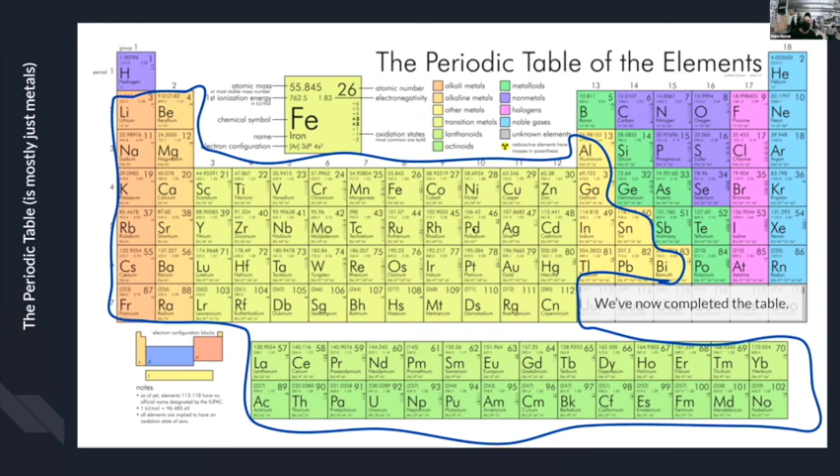Which is fascinating—most of our planet by mass is metal. There's tons of metal all over the place, and it gets used for all sorts of things. Iron is definitely going to be the biggest player in that game, but there's lots of other really fun metals to play around with. But just in general, if you're trying to understand metals, it's a huge category for what's going on there. I want to also say that it is a deep, deep well—you can get a degree in metallurgy.

You can absolutely go very deep in just this stuff. This is just the blend of carbon to iron and its temperatures and different things that happen so that you can get different versions of steel. And please don't try to understand that right now—if you already do, awesome.

But what is really neat is that metals, like water and ice, will melt at a certain temperature. And so you can get molten metal—you'll get this glowing effect down here. This is an effect called black body radiation, where things that get hot enough start to emit light just based on their heat. That's a really interesting effect that we'll look at and think about as we're working with metals over the next couple of weeks.

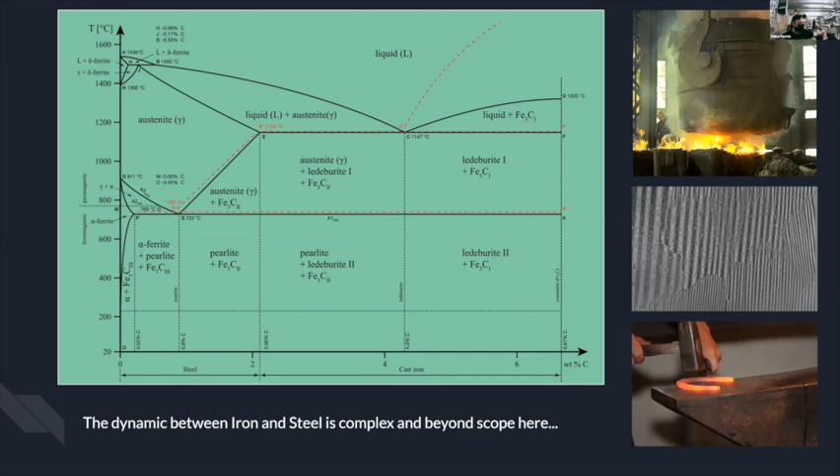And then another thing to think about with metals is that they have this sort of almost crystalline structure. This image here on the right is really a neat way to look at boundaries inside of a metal. It's different than wood—wood had those fibers, we talked a lot about grain over the past 2 weeks. In metals it's different—it's sort of one solid mass without any fibers. There are grains, but really it's sort of a solid thing without any pieces or internal structure very much, that's easy for us to get a hold of.

One of the things that's really worth thinking about with metals is that they are very hard. And maybe that sounds obvious, but toughness and some of those properties can really be quantified with things like metals. When you're talking to metal fabricators, they'll probably reference things like hardened steel versus cold rolled steel, and those different metals have very different workabilities. Then you've got something like aluminum, which is a much softer metal. So there's all sorts of range that goes along with that.

If you want to actually gauge hardness, there's multiple different scales for measuring it. It's essentially how well something can scratch something else. Not all metals, not all materials are the same hardness. In the wood shop, that doesn't usually come too much into view, like we think about softwoods and hardwoods. But in the metal world, it often is something that can be more easily quantified. The metals are usually more uniform, and it can be more important. If you're trying to make a tool versus a table leg or a support, you might have different hardness needs.

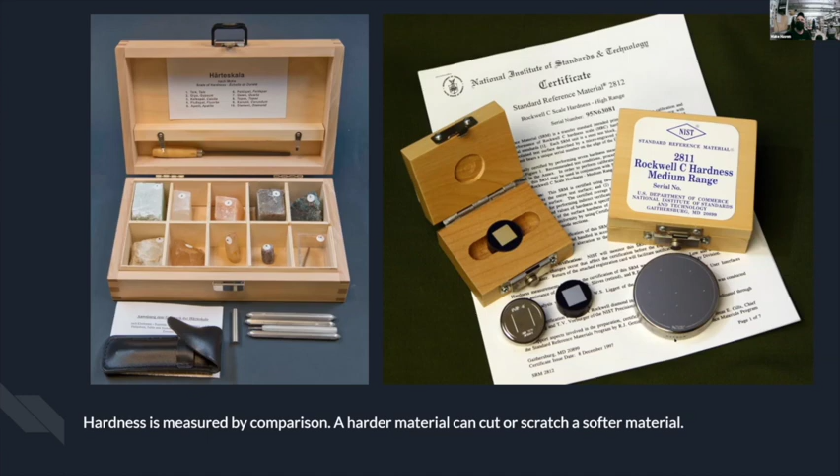It's not quite fair unless you're talking about similar materials, but this dynamic, even for steel, is something that for centuries sword makers have had to think about. The katana, the Japanese style sword, is fascinating—they're hardened on one side and softened on the other to make them springy, hard, and have a really sharp, maintained edge. That's true more broadly about most swords that were made: the sharp cutting edges were hardened one way or another, with a softer, pliable center so they could still flex and move a little.

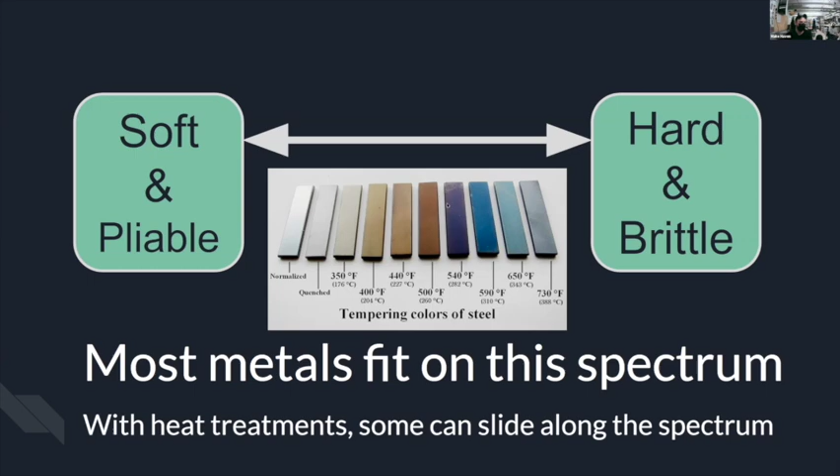Just categorizing metals, while we're trying to identify them, it's good to go through the names. We've got aluminum, which is a fan favorite. It used to be the most expensive metal you could get. The Washington Monument is capped with aluminum, in case you didn't know that, because at the time it was the most expensive metal. There's an electrical process that has to be used to get it out of rock, and that's what made it very expensive back in the day. Now it's super cheap all the time.

A machinist probably considers aluminum not even really a metal, because according to them it's too soft and gummy. I've definitely wrecked tools in aluminum. You can wreck an end mill by just having it scoop up too much aluminum, and it'll get gummed up in the tool, and then it's ruined, which is pretty frustrating.

Lead pipes, no one should be using anymore, but lead was originally used for plumbing. It's even gotten the Latin name on the periodic table, plumbum, for plumbing, although it's still not a good idea. We need to continue to not use that.

Pewter is a really interesting metal. There were lots of toys made with it because it melts at a really approachable temperature. It is fairly toxic while it's still molten, so kids' toys shouldn't be made out of it anymore, but if you want to make models, you're going to cover it up with paint anyway. It's actually a pretty fun metal to work with. You just need to keep that toxicity in mind while you're handling it. Wash your hands, do all the safety things, but it is a neat material.

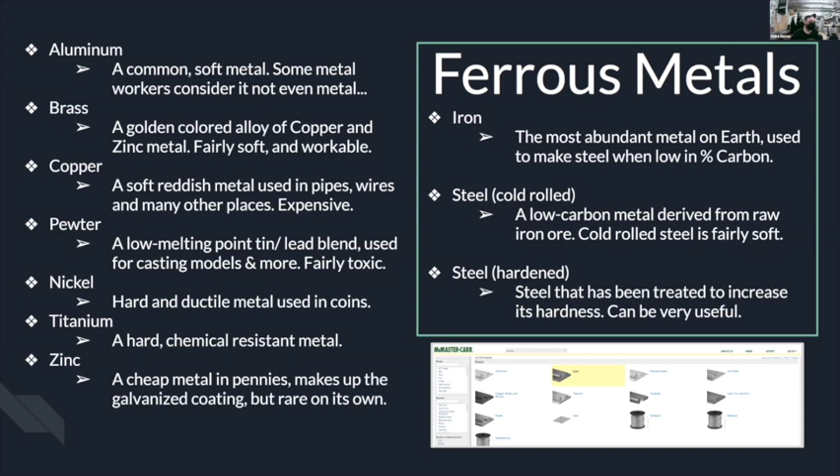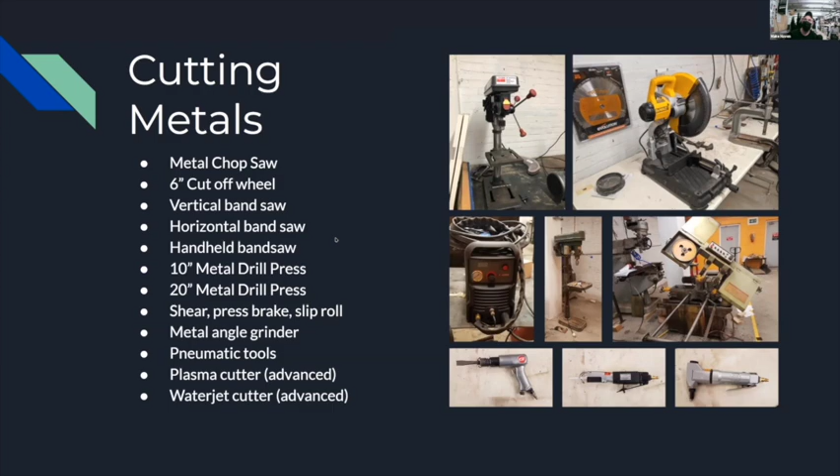Angle grinders are lots of fun. They're good for shaping things. They can be useful, but we have lots of other tools.

So if you want to grind or shape a metal, instead of just cutting it, you want to bend it, change its shape, deform it in some way. In wood, that's really hard to do. Wood doesn't like being bent, you have to steam it, heat it up, do other weird things to it. But metals do that fairly well. So it's a neat difference.

One of the people in last year's class was a metal jeweler, and she would make delicate, beautiful pieces of metal jewelry by bending and shaping. She made things that looked like flowers and all sorts of stuff out of sheets of metal. She could also do tempering to get colors and shapes out of the metals she was working.

In here you'll have there's sort of like a sander here, or these bench grinders. A bench grinder like this was always present in every garage I walked into in the Midwest, usually just for sharpening your lawnmower blades. That's what they were often there for.

But these sorts of things can be really helpful. They do come with grinding wheels. There's buffing wheels and wire wheels. Those can be swapped out, but they can give you different finishes on your metals. So if you want to try and get a shiny metal, you can head in that direction.

There's lots of these different sanding options. There's a large belt sander, there's a small belt sander. This is the brake and bender. There's also these little, this machine is a bit tricky, that's the shrinker stretcher.

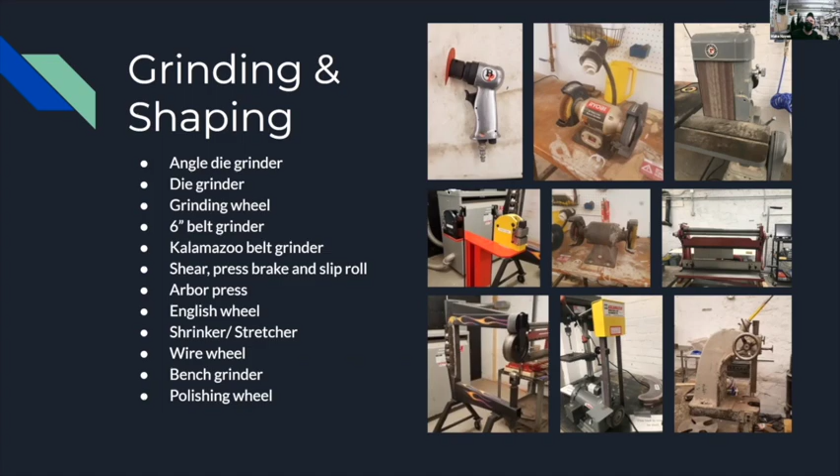If you have some metals that you'd like to bring together, there's lots of different ways you can do that. You can join metals with screws—screws are easily a great way to do that.

You may have used screws in your current or a previous woodworking project and noticed the threads for those are pretty big—you want space between them so the wood can be strong and held on. But machine screws have very tiny teeth; you can get a lot more hardness out of the metal, so the teeth, meaning the thread, can be much smaller. This thread has been specified for a very long time.

It's been a standard that somehow magically has spread globally. Very early on, since machine tools were first made in the 1700s, the thread standard became a standard very quickly. They're fascinating things—there's whole diagrams about them. But there's screws like this, there's machine screws, there's nuts and bolts—lots of interesting ways to distinguish that.

Other interesting ways to join metals are rivets. If you drill a hole, you can put a rivet through things, and they're a really interesting way to do it. These are rivets right here. You pass a rivet through two sheets, through a hole you've drilled in both, and then press it so it's up flush against this piece right here.

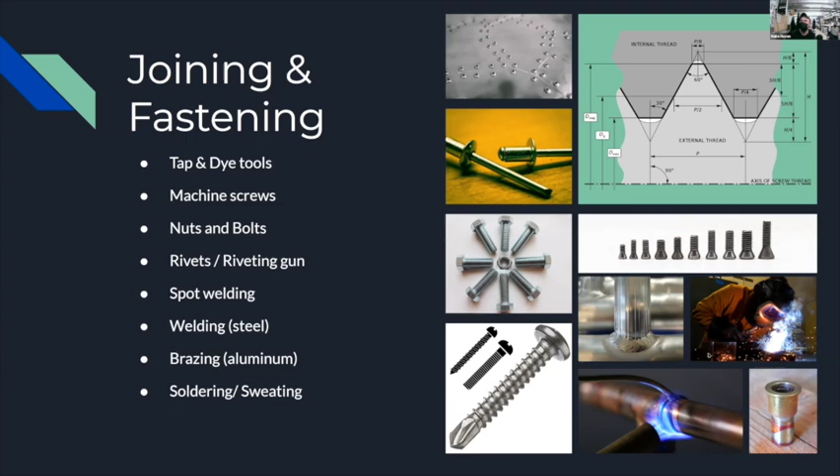Getting the MIG welding badge is probably the easiest of the welding badges, the most approachable type of welding to do. So that's a ton of fun.

A good question to ask is, what is a machinist? In the Midwest, everybody knows somebody who's a machinist, but around here I don't know if that's really true. A machinist is a special type of career, and just about every unit we cover here is a whole career.

A machinist is a person who can make things to specification. I have a buddy back in Cleveland who's a machinist that makes fighter jet parts, and he can produce things to within a certain specified tolerance. Machinists must be able to do that to a certain level of quality. Actually, a professional machinist making military grade parts, their pieces have to be to spec, otherwise it's a felony. It's fascinating how good machinists can be and how high that bar can be for a professional.

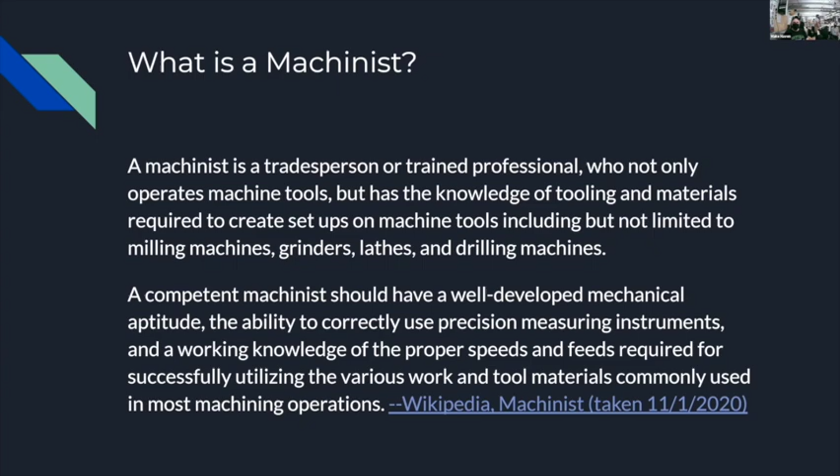Here, we're usually just sort of playing with things. We can get into that ballpark, but a machinist really has a deep well of skills at their disposal.

So if we try and think about the machinist tools beyond what we've described, we've got the metal lathe, the king of all tools. The first high precision tool ever made was a metal lathe, and from a metal lathe you can start to make all the other different tools. The metal lathe and the Bridgeport mill - a lathe is for spinning a piece of metal, and when you spin it you can cut away from it. So you make round things on a lathe usually, and square things on a mill.

They're similar in spirit - a lathe spins the piece of material you're cutting, whereas the mill spins a tool and then cuts through the material. So one has the spinning tool, one has the spinning material, but otherwise they're pretty similar. They're both very aggressive machines.

I really enjoy using the lathe. However, I want to say that those two tools in particular have day-long trainings with an additional cost with a certified instructor. It's a big deal because a metal lathe, as interesting as it is - and I want to use ours soon, I have a piece I need to really put into a true round - but like a metal lathe, if the wrong thing happens it can put a wrench through a brick wall, and it can put a wrench through you and not even slow the wrench down.

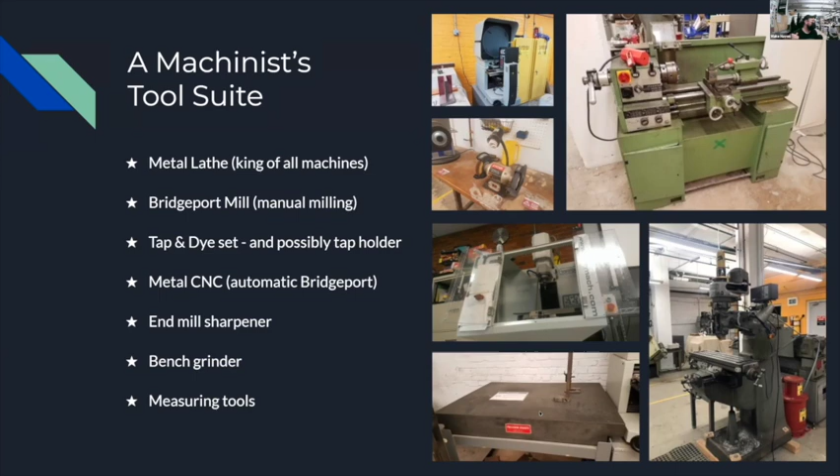Surface plates are really fascinating tools in and of themselves, but they're a high precision tool, which feels kind of weird for just a slab of granite. But it's a really cool one.

And then there's also other tools that are perhaps more approachable than the lathe and the mill: jeweler's tools, or hand working metal tools, where you might use an anvil with a hammer. You've got saws, like coping saws to cut through thin sheet metal. You can file things, hammer, saw through metals. A hacksaw can get you a long way in the metal shop. You can forge or melt metals with a blowtorch or an oxyacetylene torch.

The English wheel is fun. Files really work well. And if you wanted to get better at these things, there's lots of different ways you can do it.

If you wanted to work metal by melting something down and casting it, you can totally do that with just some sand in a bucket. It needs to be a special kind of sand for things to not go weird. But with a torch, a little forge maybe, and some sand in a container, you can do a lot of really interesting things. You can make jewelry.

There was a MakeHaven member who came in, and she teaches kids how to make rings out of just molten brass, I think she's using. So there's all sorts of cool potential for using lots of different tools at very approachable levels. I think she's doing that with middle schoolers. Everybody can do it, if a middle schooler can pull it off.

What's that? That is a great question.

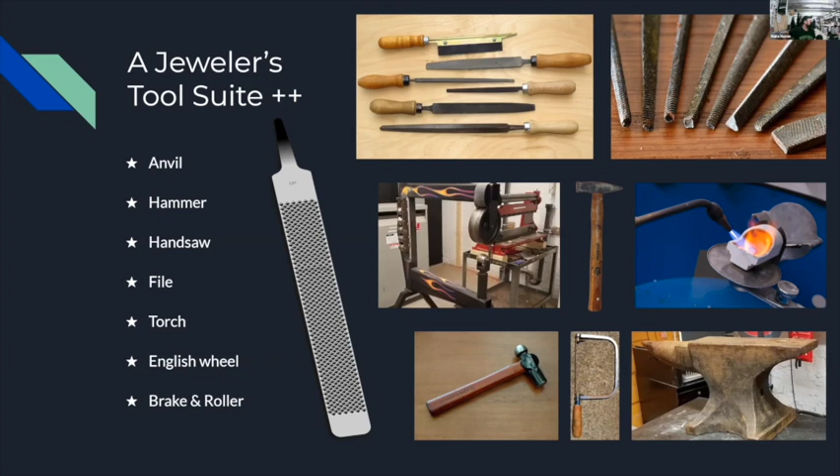We have four new facilitators in the metal shop, and I don't know all of them very well, but I do remember hearing that at least one of them does jewelry. So if you message, we're going to message the group of them, I message the facilitators to let them know that we're coming. We'll try and figure out who's the jewelry one, which is really cool, to get to lean on that experience. If that's a field you want to get into, it's lots of fun.

More broadly speaking about working with metals in general, circling back, we talked about the tools a little bit. Metals, the material, are polycrystalline solids, which doesn't necessarily mean a lot, but it does give a few weird properties. Cutting a metal is cutting a metallic internal bond.

If you cut metals, instead of cutting wood where you'd have sharp edges, metals usually leave a burr on the end, so you'll have something very sharp. If you've ever built a computer case, especially early ones, they weren't usually deburred, so the metal might cut you. You need to be careful with things you've just made in the metal shop. Their edges are often very sharp, and usually just touching them with a file, going a nice pass over all the sharp edges, can really go a long way to keep your fingers from bleeding.

Whenever you cut metal, it's a high friction event. These are some carbide inserts, cutting in a GIF loop, some metal off of here. It's really neat to see those carbide inserts do their cutting. Carbide is harder than the metal, so it's able to do that cutting well. And you can see those chips coming off.

These chips should be, in theory, where the heat comes away from the metal. If you ever look at a weld closely, there's usually a little heat affected zone, an area that's slightly discolored. Ideally, when making a cut on a machine, all of the heat affected zone leaves with the chips. When we look at sawdust, a lot of the time it's just sort of annoying and in the way. When we get to doing CNC work in the wood shop, we'll start to talk about chips more.

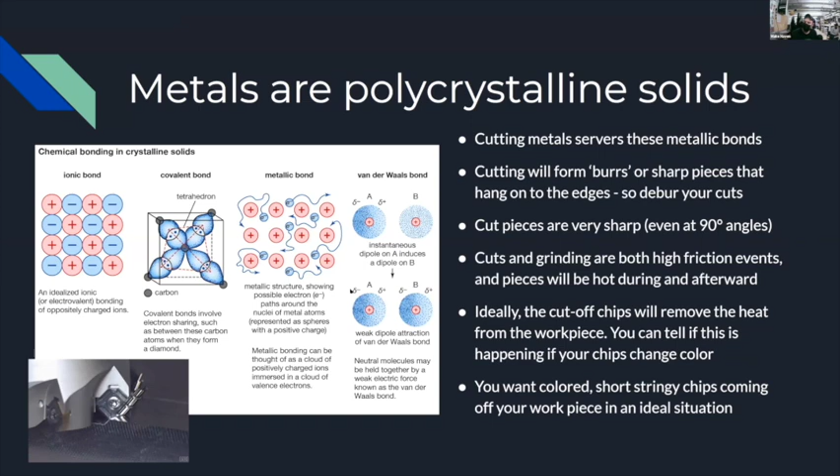As we're talking about cutting things and how these chips happen, we definitely need to think more strongly about personal safety in the metal shop. It can be a fascinating place to do really cool stuff, but as we're walking in, we want to make sure we have goggles on so flying metal chips aren't a thing.

There are lots of different tools that are buddy tools in the metal shop. We have this TV here so that as Mara walks in, people can see into the metal shop with an uninterrupted view. It does have a 2 or 3 second delay, but they're in there doing their thing. A buddy tool really means you'd want to be in the space so you can have clear eye shot to the person. Another important thing is to always know where the emergency shutoff is for whatever tool you're running.

I've had very old tools, like a jigsaw from the 1940s, and that jigsaw had a lock-on feature. That's a terrible plan. In the metal shop, you always want to know how to turn it off. None of our machines have a lock-on feature, they all have emergency shutoff buttons, so you definitely want to know where that is before you turn it on.

Another important thing is no long hanging sleeves, hair, or whatever. Also, you probably want a cotton-based outfit, cotton or leather, not synthetic. A lot of the high heat things will just melt their way right through the synthetics, whereas cotton will bounce off of you instead of sticking and melting its way into the garment.

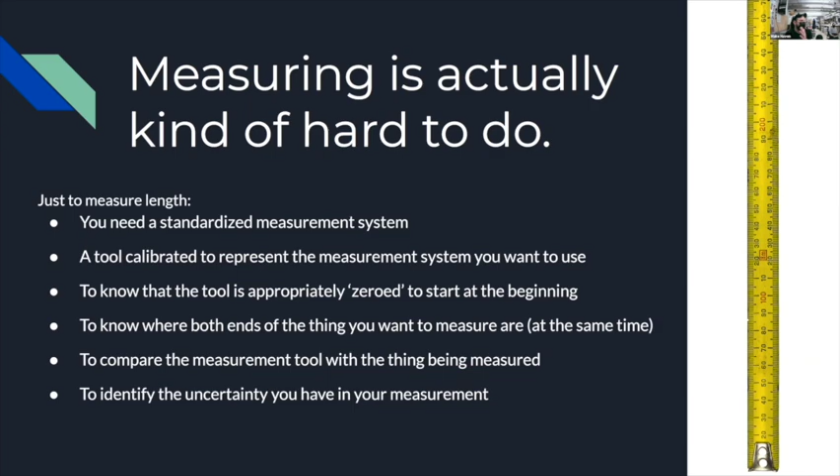Most of our projects over the next two weeks probably won't hit that level of precision, but there are some important details if you want to measure things really accurately in the metal shop. Whereas in the wood shop, because of wood movement, that level of precision just can't happen. The wood is going to expand and contract up to 8%, and that's a lot of movement. Whereas metal is going to stay basically the same size, except for heating and cooling, which happens very predictably. So hitting measurements is really important.

With that, a good set of calipers can be your best friend. If you haven't played around with these, you should this week. You get three different types of measurement. On the bigger claws, you can measure the width between them. The smaller ones are for measuring inner diameter, like inside of a pipe. And there's one on the end for measuring depth. All three are measuring at the same exact time, and there are different levels of measuring tools.

I have some that I carry around all the time. I wonder if I've actually got them in my bag. But these I usually carry around with me. In here you can have measuring tools like these. Mine have no dial on the front. There are ones that come with a dial like that. Most people really like to get started with the digital readout ones so you get a nice, easy, clean reading right off of it digitally. But at different levels of precision, you may want different tools. I like these because I nerd out on measuring tools, but those different tools can be really helpful if you're trying to hit exactly the right thing.

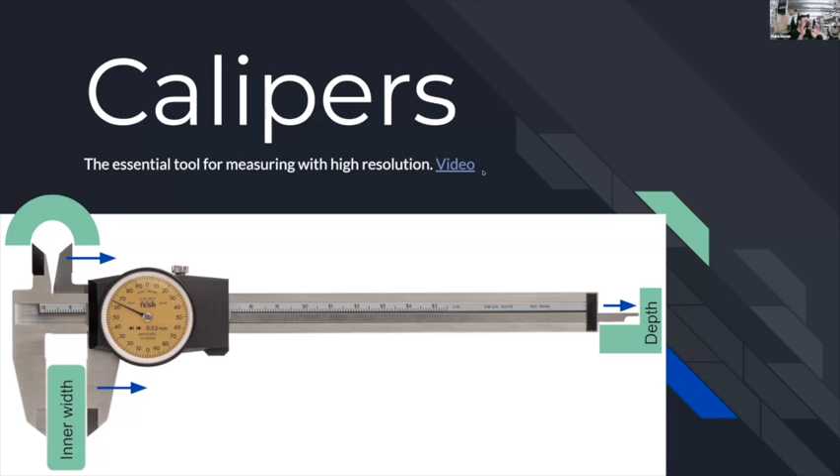I'll post a link to these slides, and in there, there's a video on exactly how to use these if you'd like a quick refresher or overview on how they work. Or we can absolutely use some if we're in the space together—it's not a long push to get me to measure something.

So, starter metal projects. This week we're going to talk about how to get you going. We're not necessarily starting a project this week, but just thinking about what could be good projects to do. Good starter projects could be your first weld—maybe you weld your name into a bar of metal, or weld a friend's name and give it as a gift. It's a fun thing to lay down a bead of weld, and it's definitely a skill you get better at with practice. So you can play around with that, and having some fun welding projects be a good first project.

Sheet metal cutting and bending can be really neat. If you're already good at 3D design, there are 3D design softwares that will help you design and plan 3D bends or metal bends based on the bending properties of those metals. So there's some really cool stuff that happens in there.

And if you want examples, I've got a few. A good example: if you know how to do sheet metal bending in design, you can also use it for plastics and other things. Another good one is to use a saw and a file to shape things, to make little metal structures, little metal designs. It's actually pretty approachable to use a file and really make a tiny metal sculpture.

It's totally possible to do, and it makes for a really pronounced effect. There are different materials to change the surface color of metals so you can have a blackening, so deep crevices look dark. Think of class rings for high schoolers that have the dark color inside, or the darker features inside of a ring. You can have a blackening feature there.

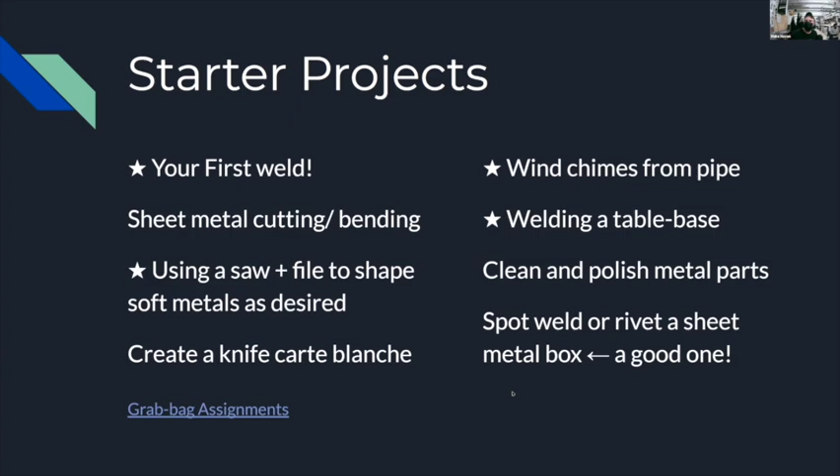So yeah, those are the slides for the day.

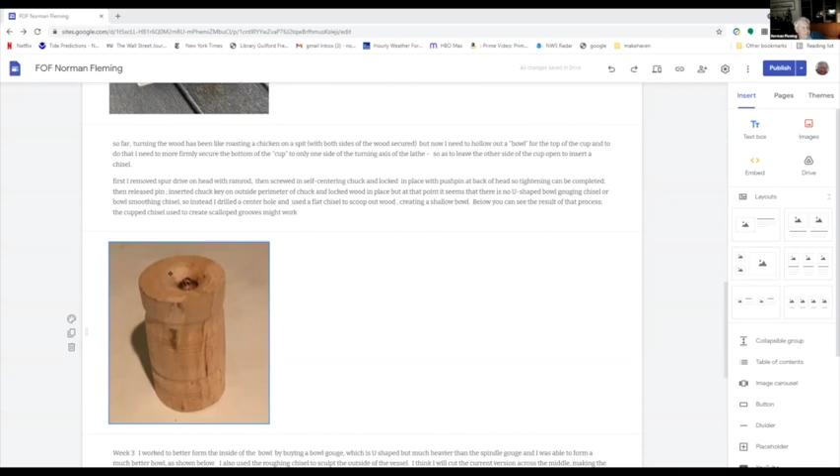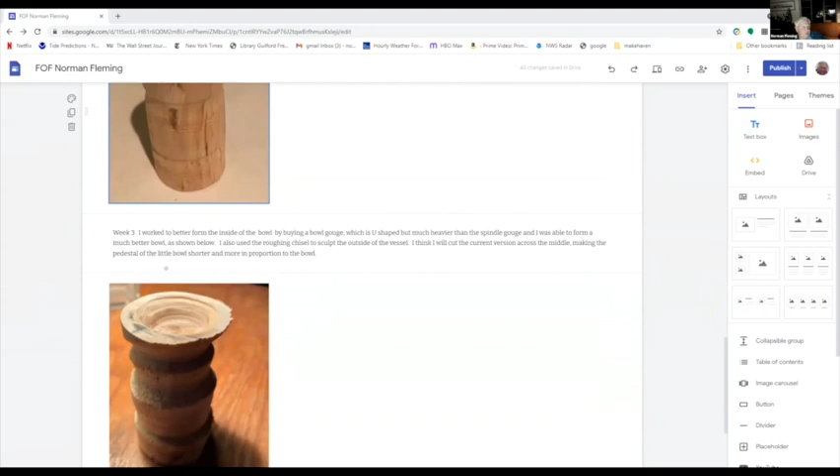So last week I cut a branch of a tree and wanted to figure out how to use a lathe, so I got it cylindrical and figured out how to design it. This week was more about trying to figure out how to do a bowl, since eventually I'd like to make bowls. A couple people suggested using a wide drill bit to start taking out some of the wood, and I tried that, but for me that wasn't the very best. So I got a U-shaped gouging tool, which did a much nicer job at reaming out the center. I'll probably cut it off part of the way to make a small bowl that might hold nuts or something, and smooth it up. But eventually I want to make nicer bowls now that I have some sense of how to do it. So the big thing this week was really getting the bowl shape done.

Cool, yeah, making bowls is totally an art, and just getting started with it is a ton of work. So the fact that you're headed down that road, you've got the right tools and the right skills to get going in that direction, is real exciting. I'm excited to see how you'll develop as you do more of it. Great work this week.

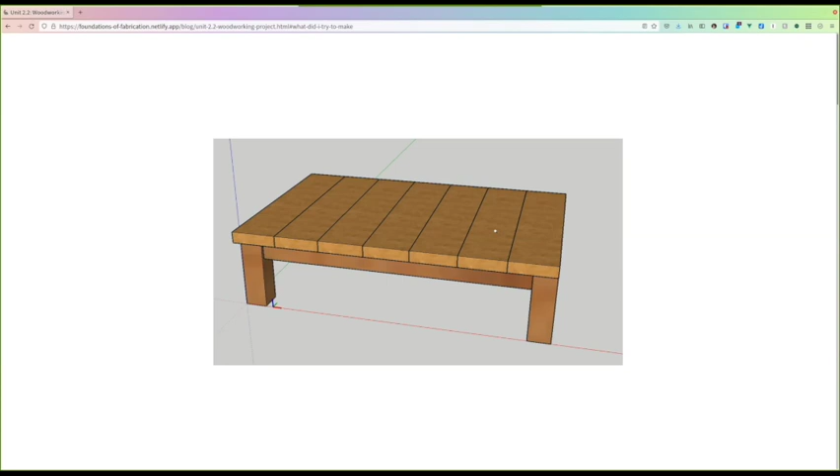One of the other changes I made was deciding to use mortise and tenon joinery to attach the apron to the legs. That ended up making me change the design, and you'll see later there was a mistake, so I didn't get to finish all of this. But I got the panel done, which I'm pretty happy about, and I got the legs done, which I'm pretty happy about.

I had originally used the jointer and planer on a bunch of these boards, and after a few passes I was wondering why this board looked so much worse than it did right off the shelf. I realized it had to do with reading the grain. That was after I sought some advice, because I looked at these boards and thought they all looked reasonably flat, just not level with each other. I probably should see what I can do with these before gluing them up. I was told it had to do with the grain, and after fixing that up, these were much more even.

After using the jointer to try to edge joint, and also using the table saw just as an experiment to see which one worked out, I ended up liking both about as much. But I went with the table saw just for practice.

These fit much better. One of the things I did was alternate the grain direction in terms of the end grain, so they would make a squiggly shape to help reduce cupping. It ended up still cupping at the end, but not as much as I'd expected. I realized it might have had to do with forgetting to alternate the direction for one of the boards, so there was one section with two upside down U shapes right next to each other that I forgot about. But it otherwise turned out pretty well.

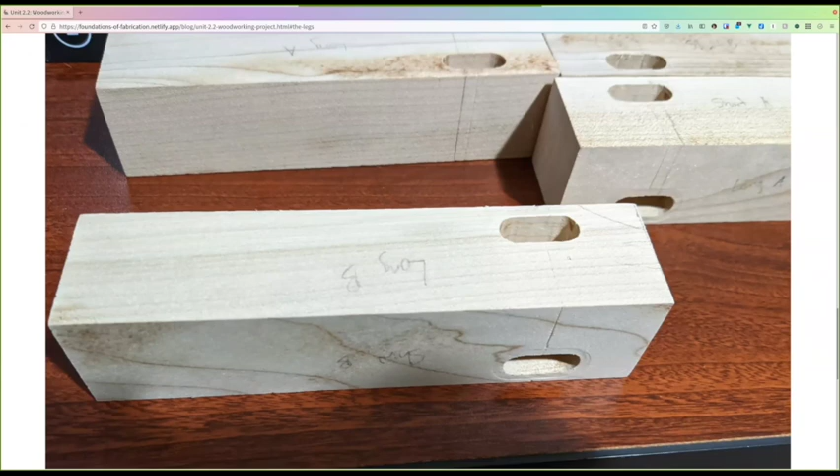After choosing the depth and width I wanted, this is one of the design changes I made. I ended up not having the mortise right down the middle, and not at a certain spacing from the top of the board, which threw off how I was going to do the aprons. I'm still pretty happy with how the mortises turned out, but because I stuck to the old design and the old cut list I wrote, I accidentally ripped the aprons so narrow that they didn't line up with the mortises as well as expected.

Either if I wanted them centered, there'd be a big gap here, or I could have them flush with the top of the legs, but then you'd see a small gap here. So I ended up not doing that - I decided I would work on the aprons later. But this was one of my practice pieces, which I'm pretty happy about.

Paul recommended that I hand cut the tenons, so I tried using the Japanese handsaw. It looks pretty rough, but I'm pretty happy with how it turned out.

I figured, given the amount of work this took, do I want to go through with making 8 of these? And I thought, yeah, but assuming I didn't rip down the boards too narrow.

So I'm gonna keep working on that. That's really cool, I love that you 3D printed a jig for the router. That's the lovely world of integration where I think all of these skills get better the more of them that you have. When you realize, oh, I want to make this cut but it would be really hard to do with what's available, you just 3D printed yourself a solution. That's just kind of wild. So great job with that.

I hope you're having fun. If your apron stretchers are just a little bit too short, your legs are a little bit too tall, I think I would probably glue them up and then sand the end grain on the top of the leg just a little bit shorter so it comes down to meet the stretcher. I don't know the exact dimensions, but that would be a cool way to solve the problem. That could work. I ended up ripping the board so narrow that the bottom of the board would be pretty much right where this mortise ends, which is doable.